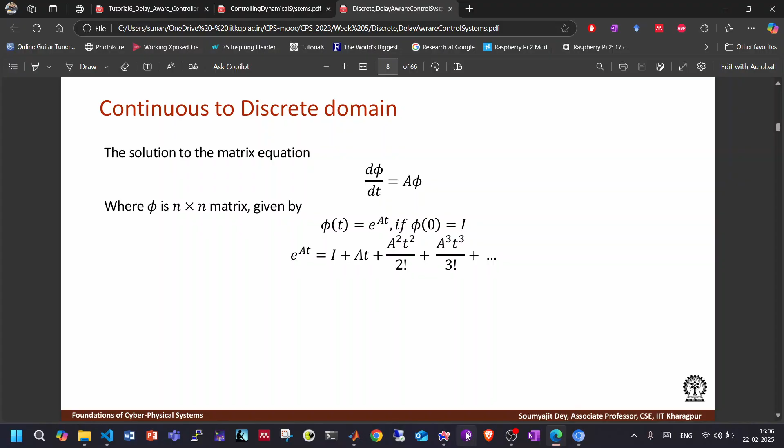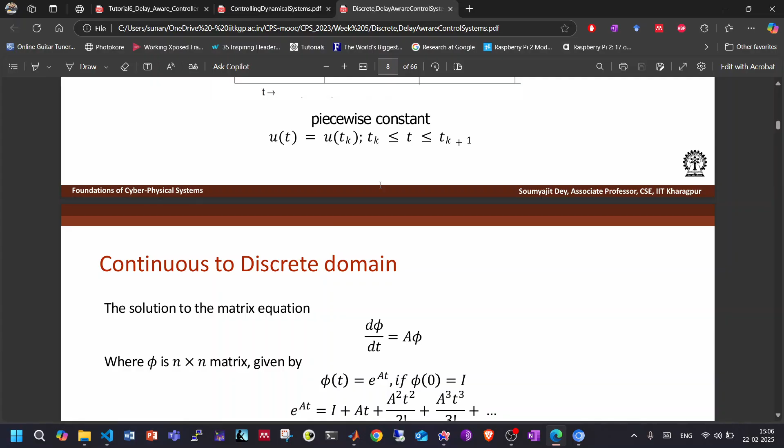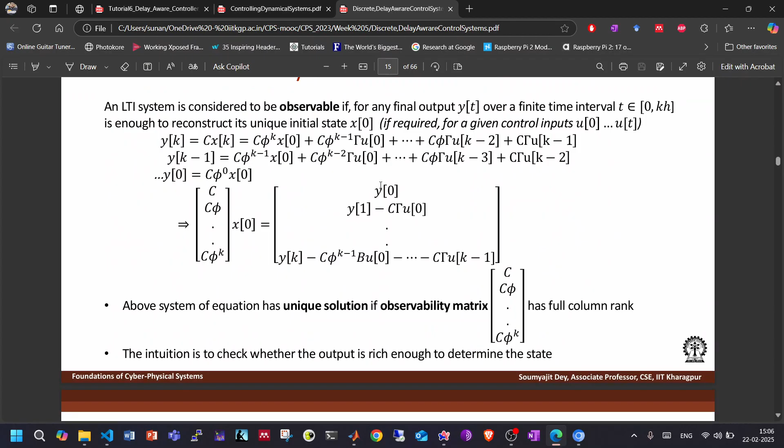So last week and this week, I think up to delay aware system design, controller design is covered. So I will take you through the lecture material once, then we'll solve some problems like we do for all the classes. And meanwhile, if you don't understand some part, please let me know.

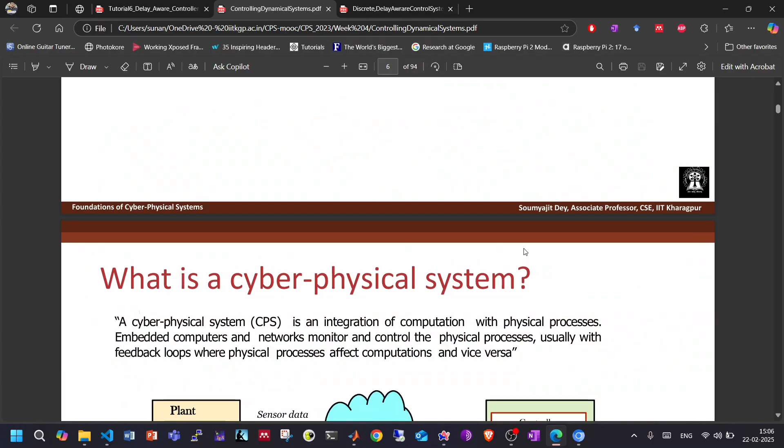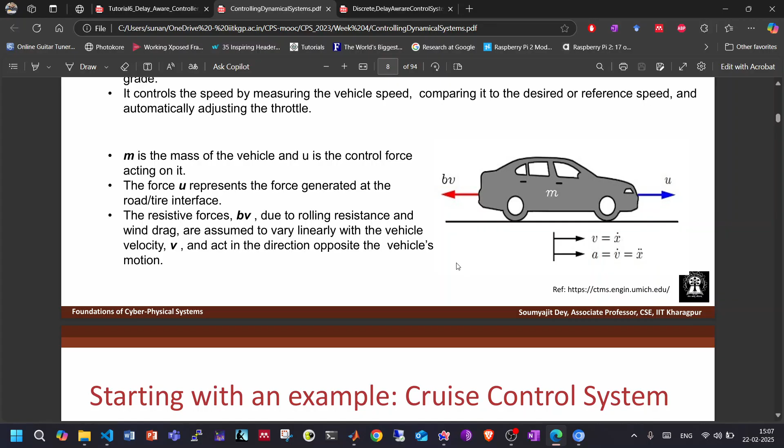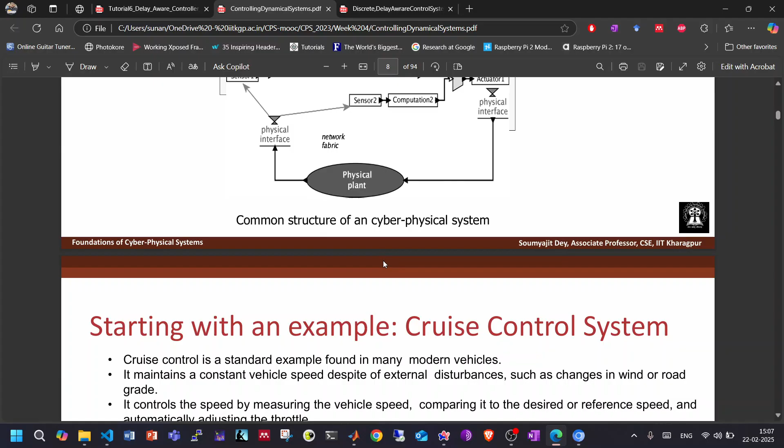So, any specific part that you have problem with in the last week's lecture, not this week's? Hello, am I audible? Is there any part that you would like me to explain specifically where you were stuck, for this week's lecture or last week's lecture? I'll focus on those parts then.

I mean, solve examples on state space design. Assignment problems, they're very difficult to solve. So last week's assignment problems were okay after the tutorial, scheduling and everything. You were able to solve somewhat? No, see, problems in the sense, we are getting theory, but I am not able to solve the problems of assignments. I'm telling about the scheduling part. After having the tutorial, we solved some problems there, right? So were you able to?

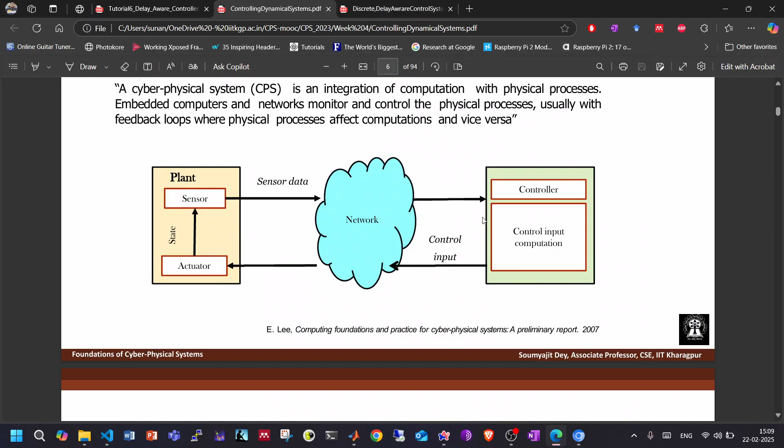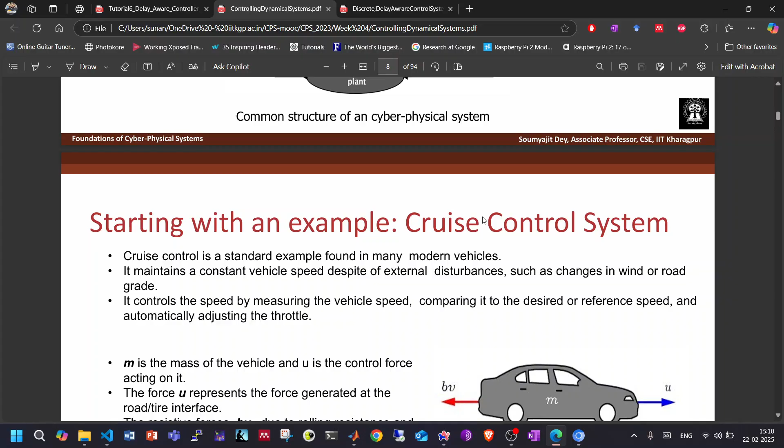No, last time I could not join because your link was there. I tried last Saturday. Last Saturday, I mailed everyone that I will have a class together in the next week. Last to last Saturday during scheduling, that was okay. Last assignment also I scored very less marks. So the assignments are weekly, you have to complete weekly, or you can complete anytime? Yes, weekly, you have to complete weekly. Okay, okay.

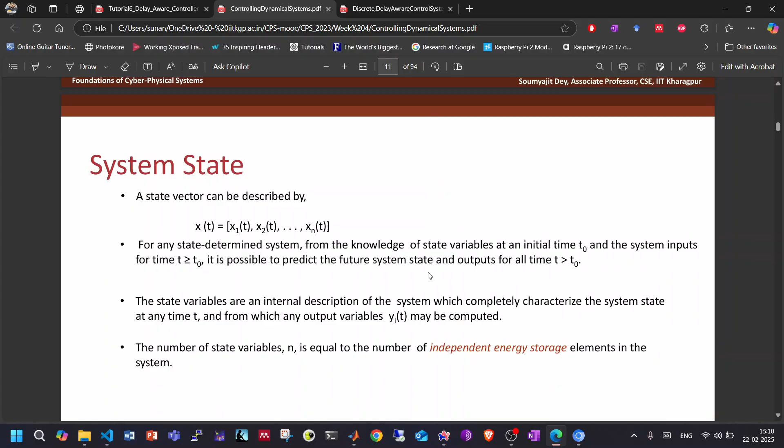So last week's tutorial was mostly on, I guess, state space model design, system design. So I think some examples on state space system design were given in this slide itself, but I'll go through the basic ideas of how to design the systems and everything. So these parts you will already know since you have a control system background, I am guessing. But still, if some other people join, for those who are not aware, I mean they don't know about this part because this is not typically computer science.

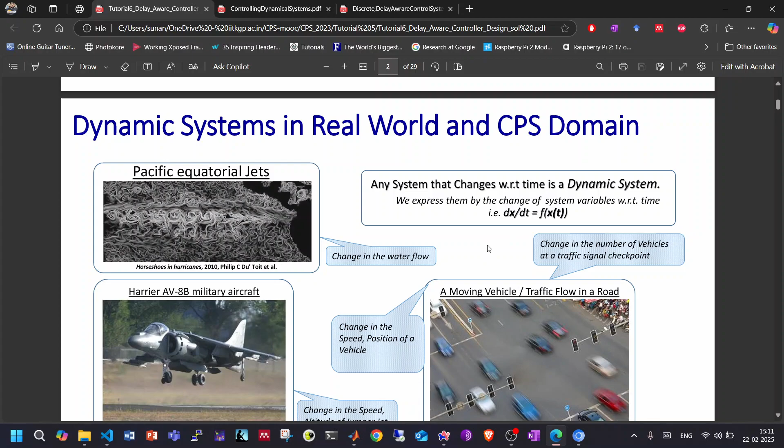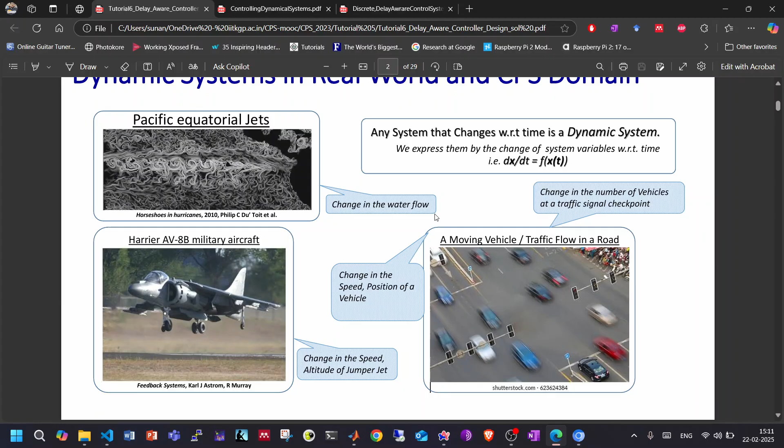So basically, when we are designing a system, any system, when you are designing any dynamical system, there are basically some variables that are changing with respect to time. So that is how we model any system, and that is like our ordinary differential equation. And when we are solving in this course, mostly we'll concentrate on the part where we are discretizing the system and then making the controller of the system. That is the part we are interested in.

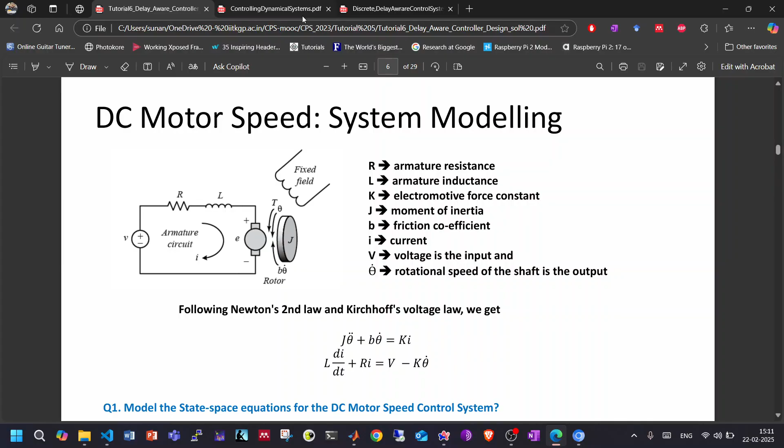So for example, if I consider this DC motor, so basically before going to this example, I'll just quickly scroll through the PPT. So basically when we are designing a system's states, what a system's states basically depends on is what you are trying to control. So if you are trying to control particular variables of a system, particular parameters of the system, and you have a certain desired value in your mind that you want that particular parameter or variable to reach, you have to force it.

So it will not naturally go towards that value. Depending on if the system is stable or unstable, either it will converge or diverge. And even if it converges, what do I mean by converging and diverging, that I will explain. Even if it's converging, then also there can be a problem, I have to force it. So basically there can be multiple states in this process that we have to consider in order to compute.

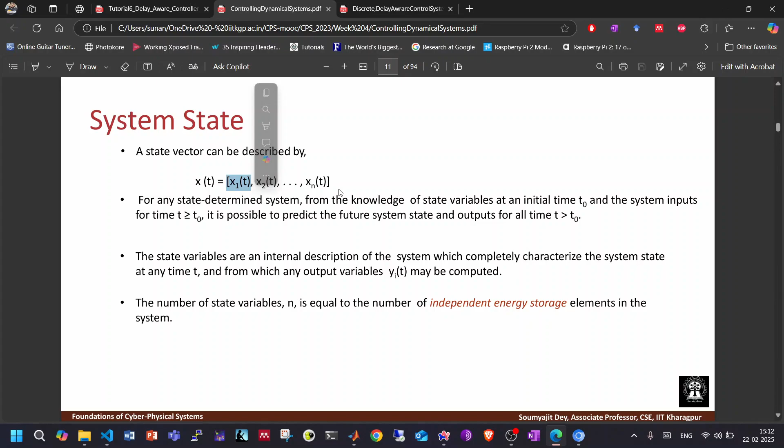Maybe I am interested in a particular state x1. For that I may go through some other states, because I cannot design a system directly having a state x1 while ignoring some other states that are already coming in the way. So basically some states we will observe, and based on those observations we'll control that particular state. But in between there will be some hidden states that might not be measurable, or might be measurable but not of my interest. I need to control a particular state among those observable states.

So observable states are basically expressed as y, or output states. So these are basically the internal states of a system.

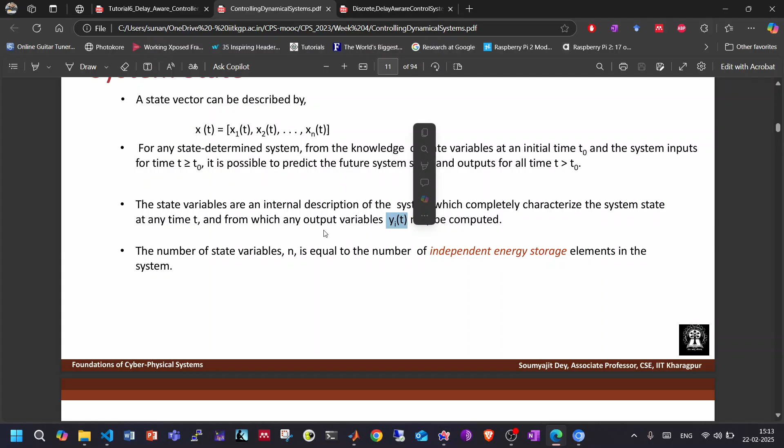If there are n states, maybe there are m observable states or output states that we need to observe and compute control for. So this is how they are expressed, and mostly we'll work on linear systems here.

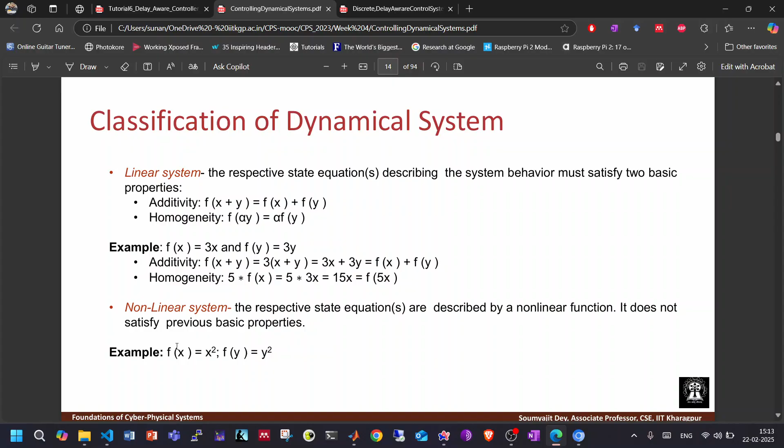Now nonlinear systems are more complex, so we'll start with linear systems. Obviously they are linear time invariant systems. Linear systems have these two properties: additivity and homogeneity.

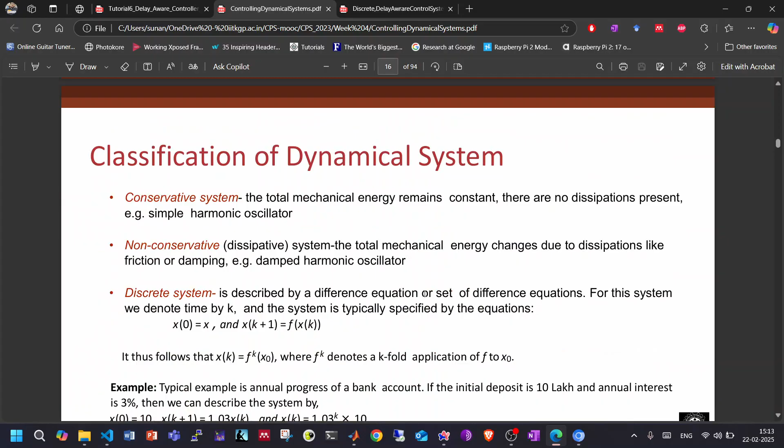For nonlinear systems, the equations for the change of variables will be nonlinear. I'm not going into these things, they're already in the slides, so I'm not going through them. But there can be questions from these categories, and these will be doable, I think.

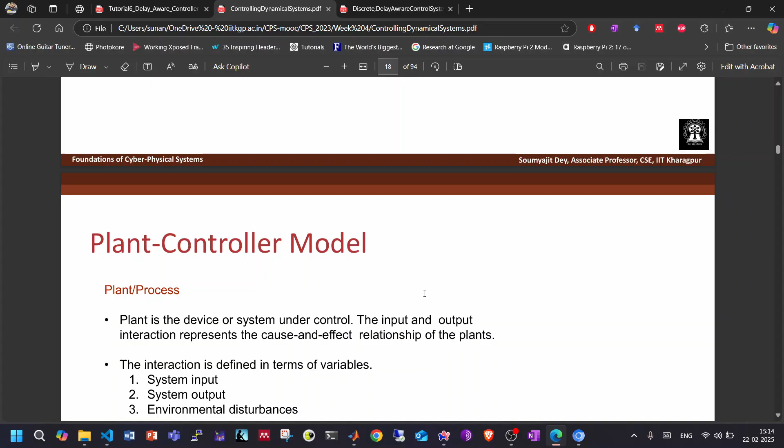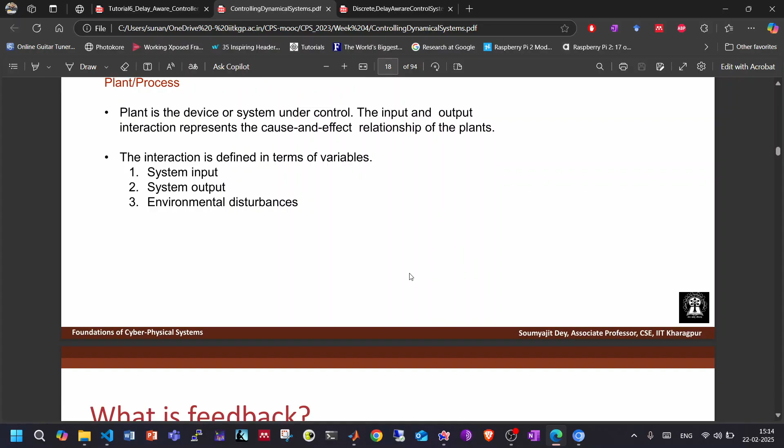So plant controller model - basically some system input will be there, output will be there, and environmental disturbances will be there that will stop me from achieving the desired value I want. So I have to force the system towards it.

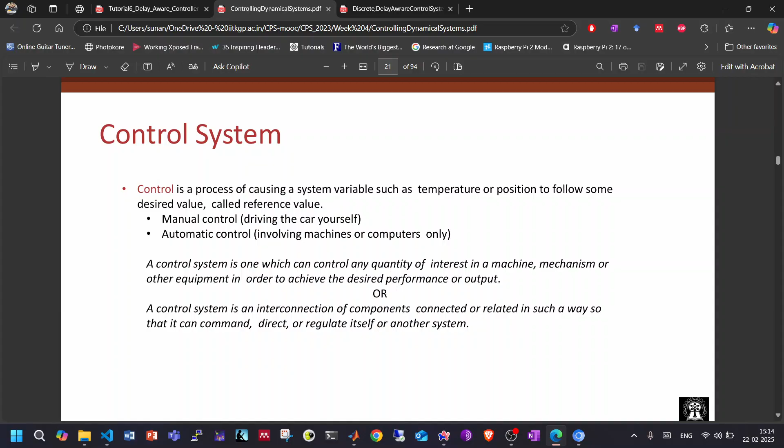That is what we are trying to do by designing a feedback control system. Feedback is something we are getting from the system output. As we discussed in previous classes, actuation, sensing, and computation - these are the three parts of the system.

Sensing the output variable I want to control, or maybe other variables too. So sensing them, computing a control law that will send this sensed variable towards a reference value, and then I'll actuate those particular control inputs to the car.

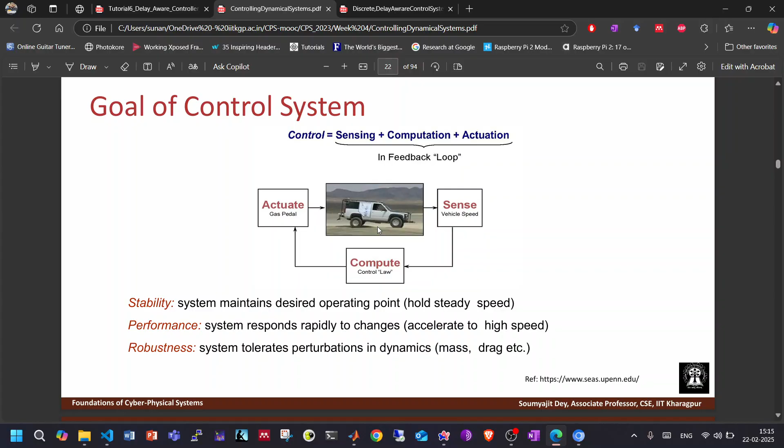Usually when a driver is driving a car, he or she is controlling the car as wished. So if you want to make it do this autonomously, you have to design a controller for that. That's how controller cars are designed.

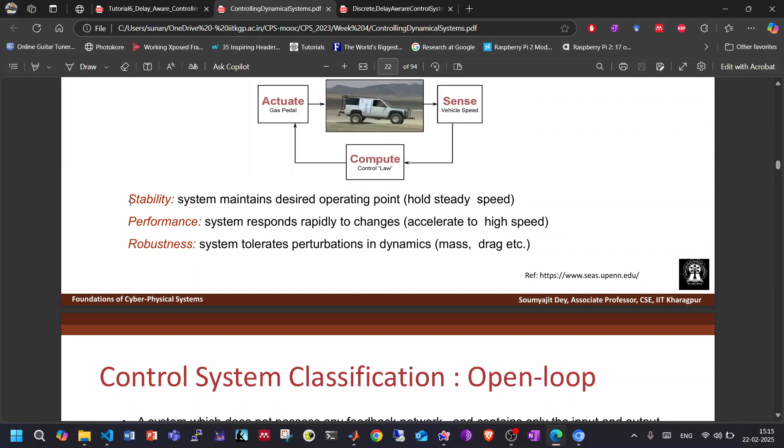Now these are the three primary things we have to take care of, among others. There are other things like safety and sensitivity. Those will come later, but these are some of the primary things to take care of when designing a system.

So stability and performance - these two will be part of the lecture as we move through it.

Open loop system is basically where we don't have a feedback loop involved in the system. So the process runs by itself naturally - be it a stable or unstable process, depending on its behavior, it runs automatically. We are not forcing it towards something based on feedback or other logic.

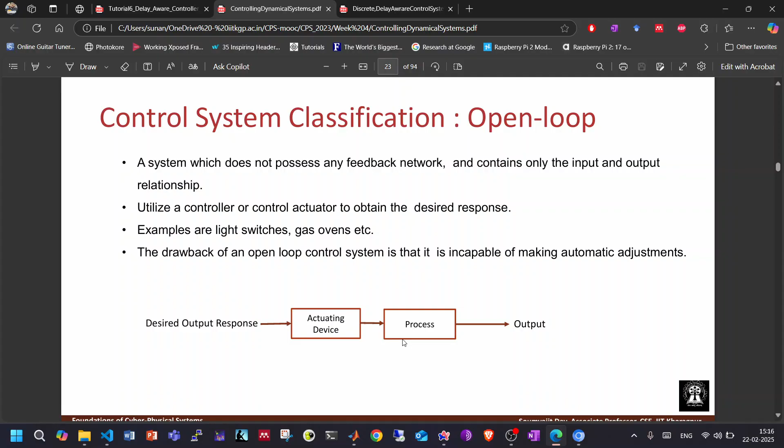Basically we are not using feedback, we are directly giving some input signal. That input signal will depend on some other values, but we are not considering the feedback from this process. This is called an open loop system.

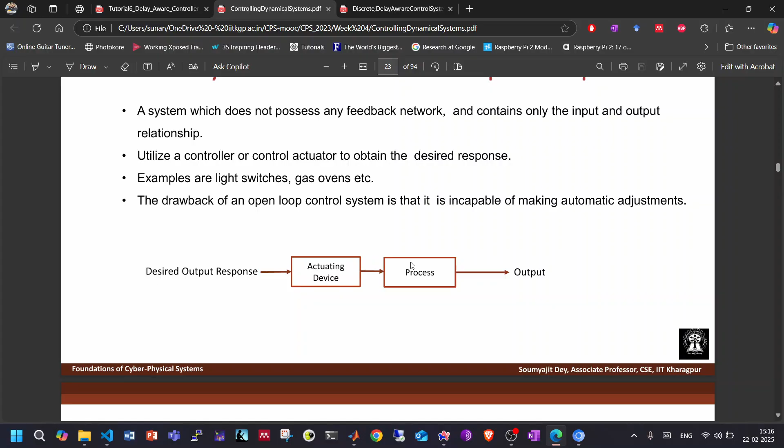Closed loop is basically taking feedback from the process - how the process is reacting to the control input I am sending - and based on the feedback, I measure what should be my next action, decided from the measurement of the output.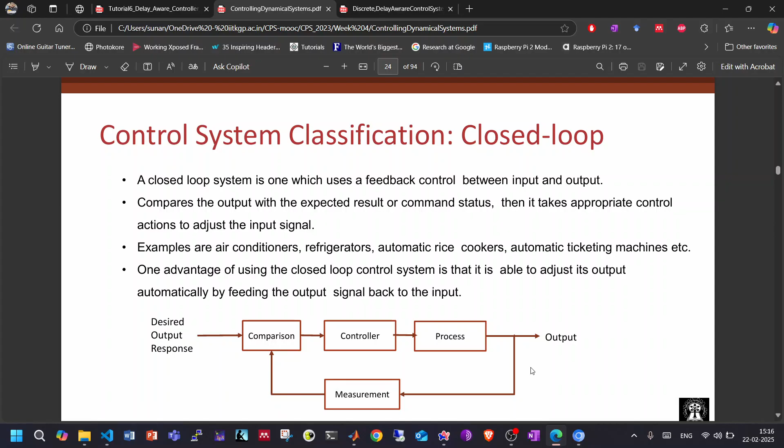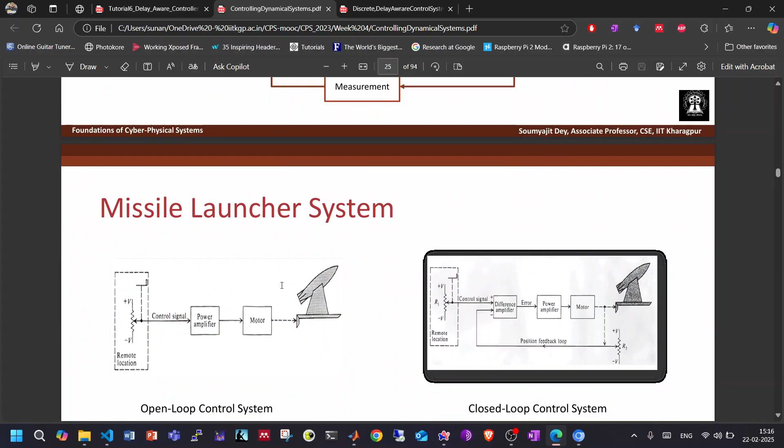So basically, I compare where I want to go, what is my desired output, and what output I am achieving now. Based on that comparison, I modify my control input, and accordingly force the system towards a certain desired output response.

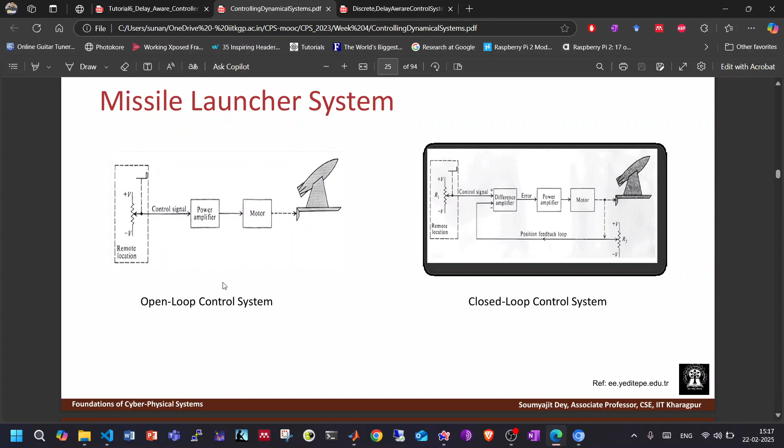That is the idea for most systems - you will see this idea whether it's a missile launcher system or any other system. We'll see some modeling of systems in the tutorial.

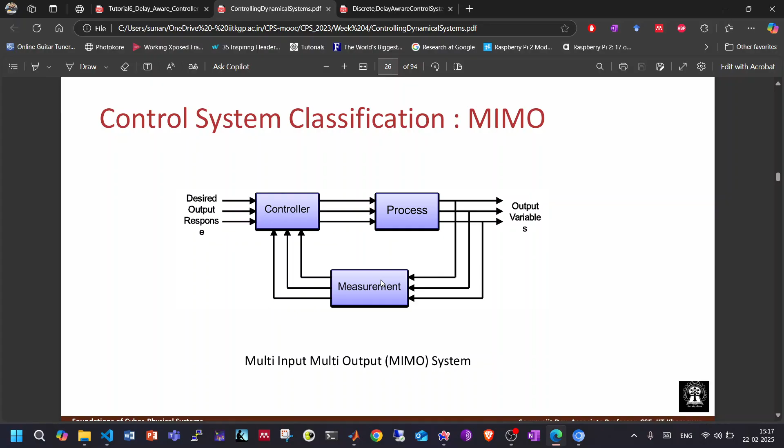You already know these things, so I am not going to go through them. These are very straightforward block diagrams that you can see.

Here I am trying to achieve this reference input, and I try to find out how far I am from that reference input. Based on this error, I compute the control input that I should actuate to the system - I should not say inject.

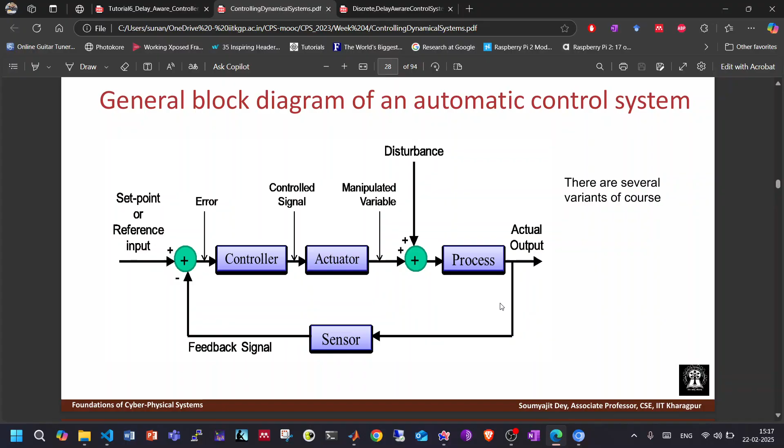When I'm actuating, there may be some disturbances involved. So where I'm supposed to reach, this will not let me reach that particular output easily. I have to try, and after a certain number of iterations, I'll be able to reach there.